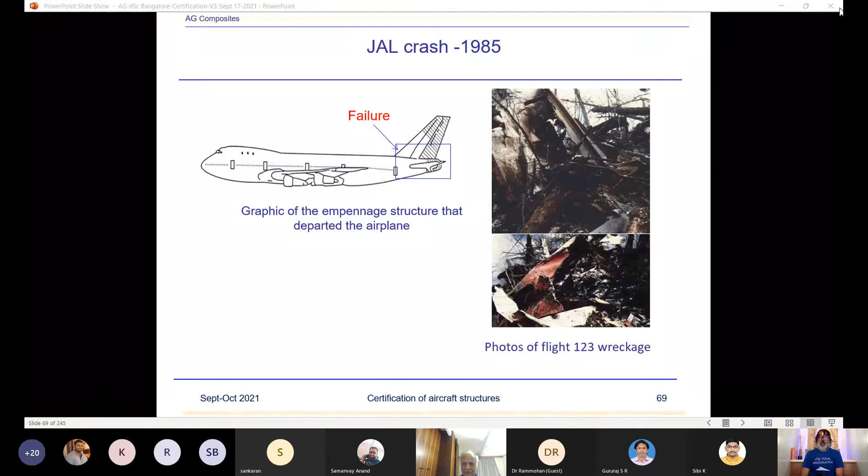Is it better now? Well, still again there's an echo. Let me see why the echo is coming. Okay, we can continue. Okay, yeah sure.

So one more participant is shown as Amar Garg 68. So probably that also, if sir can shut it off. I don't know, I might have logged in a couple of times. Oh yeah, you're right, there's a fourth one. How about now? Yeah, now the echo is not there. Oh wonderful, okay, so you were brought in four times. I removed three of them. Yeah, maybe, sorry for that, I didn't realize. Okay, now again.

Good afternoon again for this lecture. This is the second lecture of this lecture series, and we'll continue from where we left last time. Last week we had a good response from you people, and quite a few questions were asked. At that time I did answer some of them, but of course they might not have been very detailed or satisfactory answers. So what I did was pick up the questions again and prepared better, detailed answers and sent you the presentation.

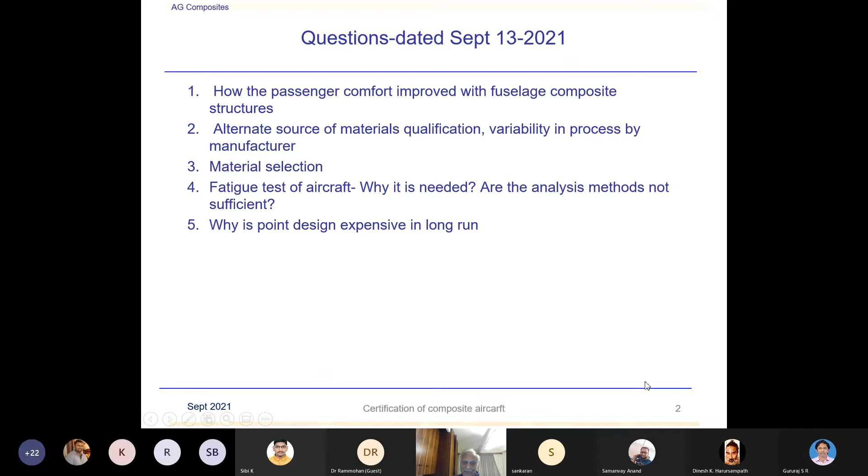For example, with a design cruising altitude of 43,000 feet, the differential pressure for 6,000 feet cabin altitude is 9.29 psi, versus 8.43 psi for 8,000 feet. I don't know the exact design condition for the 787, and even if I did, I couldn't disclose it unless it's published material. This is a hypothetical example, though it may not be entirely hypothetical. I've taken this data from a Boeing commercial jet transport report, published in open literature under NASA sponsorship, from sometime in the 1980s, which would represent the typical design condition for commercial jet transports, possibly including the 787.

The possible cabin pressure altitude is likely 8,000 feet, since that's been typical for all commercial transports, though the report doesn't state it explicitly. The normal operating differential pressure for which it was designed comes out to about 8.6 psi, fairly close to the calculated 8.43 psi, so that's likely close to the true value. There's also a maximum relief pressure considered. For ultimate pressure, if the cabin structure design follows a factor of 2 times 9.1, that gives 18.2 psi ultimate load-carrying capability, which is possibly what the fuselage skin was designed for.

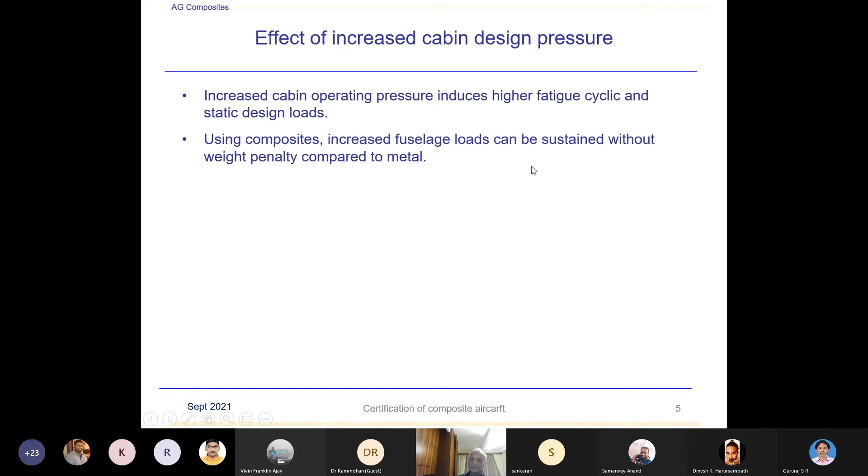Okay, next, it's just explanation. Increased cabin operating pressure induces high fatigue cycling. So static loads using composite, I've already talked about it. Okay, now next question was...

Sir, just a second sir, can you hear me sir? Yeah. Okay, is this cabin pressure fixed to a particular value, prefixed, or can it be varied during the flight? Oh, which one, this pressure? Yes, cabin pressure. Oh, cabin pressure, internal pressure is fixed.

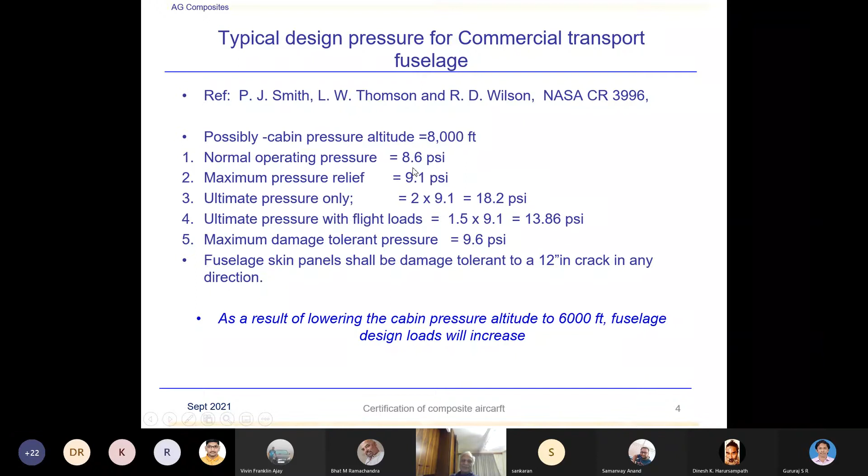This is not fixed, what happens is this is differential pressure. Differential pressure we are talking of at the cruising altitude. Suppose there is a design cruising altitude of 43,000 feet, but cabin pressure is maintained at 9.29, say suppose. Okay, I don't know what the Boeing 787 pressure is. This is from ICAO basically, the outside air pressure. They may be maintaining 10 psi, I don't know.

But this is a typical value equivalent to 6,000 feet altitude, the outside atmospheric pressure. So what happens, the internal pressure is this one. I'm sorry, this is differential pressure. What is the differential pressure? Internal pressure is this, okay. Now outside pressure is 2.49 for this, so at 43,000 feet this will be the pressure. And you have to design your structure for the maximum operating pressure. We are talking about operating pressure as a differential pressure, delta P. And that is what, when you are doing say fatigue cycling or structural stresses which are imposed, because there is internal pressure and external pressure.

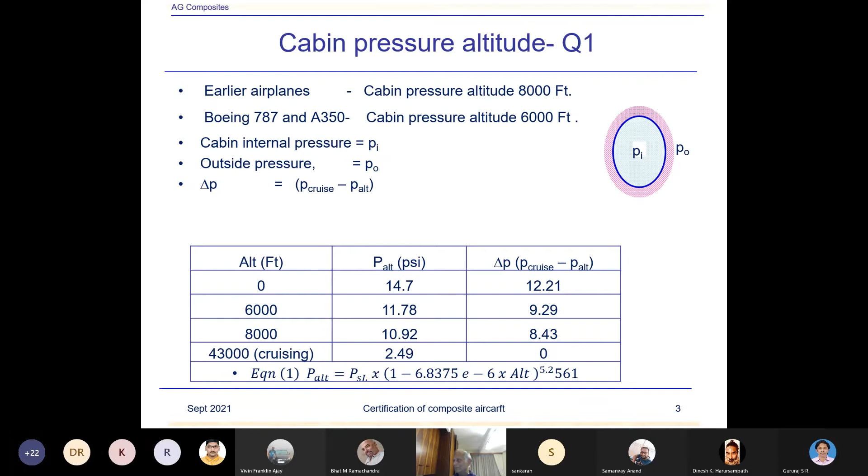Right, okay, next one.

The issue was if you have multiple suppliers, you have qualified one supplier, how do you requalify another material supplier or alternate supplier? I've written down various options: alternate material supplier, changes in processing site or equipment, changes in raw material supplier, changes in fabric type or style. Any minor or major change has to be accounted for by requalifying the material depending upon the magnitude of the changes, whether it's an alternate supplier, material changes, or process changes by the same supplier, equipment change, or assembly line change.

They cannot change anything unless they get approval from the manufacturer, that is the customer. So change in binder, alternate material, process divergence by material supplier—all these things. So next slide.

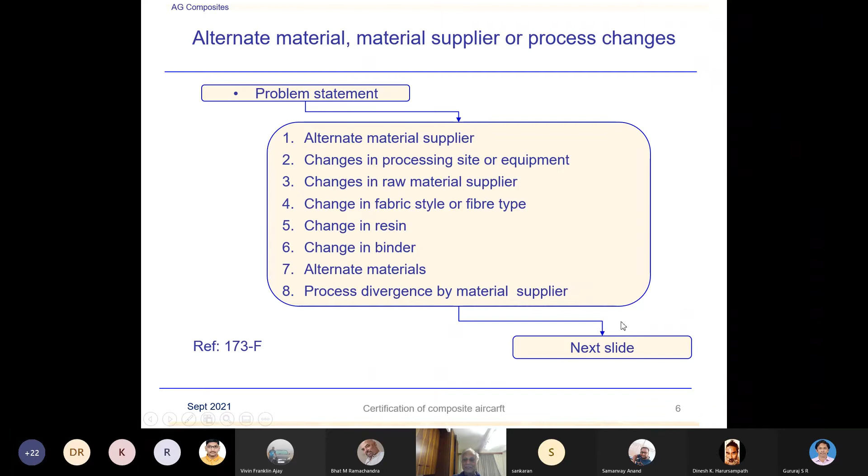So assess what happens when the manufacturer of the material or material supplier intends to make some changes. They have to communicate to the customer these are the changes being introduced and what is the impact. So as a customer, you try to assess the risk, cost, weight, schedule, and certification impacts.

Develop required test matrices and test plans, depending upon the changes incorporated. If it's a very minor change, a small type test matrix. If it's a major change, maybe a large number of tests are required, depending upon the changes incorporated.

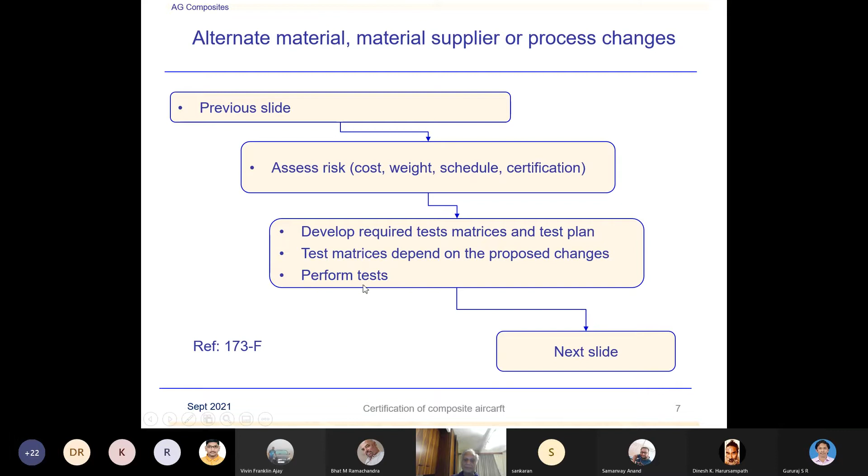So you develop the test matrix depending upon the proposed changes, perform tests, and then analyze the data. You may show the equivalency of the changed data with your existing data, whether it has any impact on the allowables. Assess the results: are allowables affected? Does it impact design and certification, cost, schedule, and weight? Then it's your final decision, depending upon the changes and effects.

So you have to do all this history. Anyone interested in looking at this process, I would refer them to read Mil Handbook 17, Volume 3. Again, it's available from the public domain, free. I would recommend each one of you download all the volumes of Mil Handbook 17. It is a very handy document.

Any question on this? Any confusion? The person who asked the question, I don't know the name, but any comments? No.

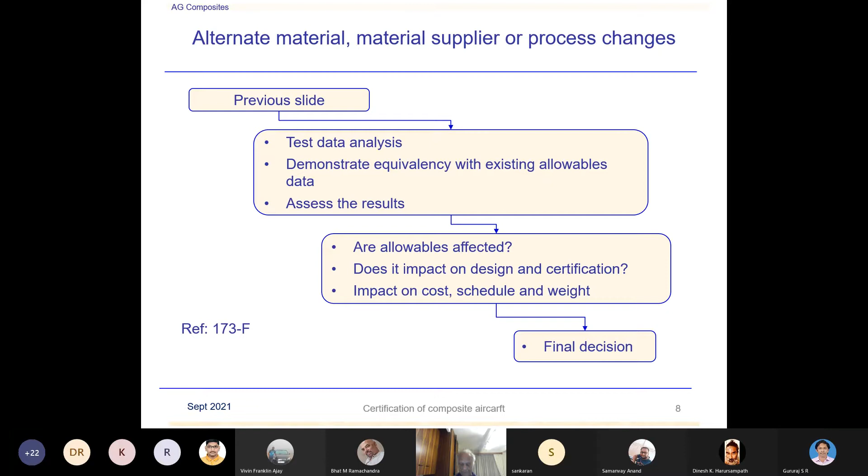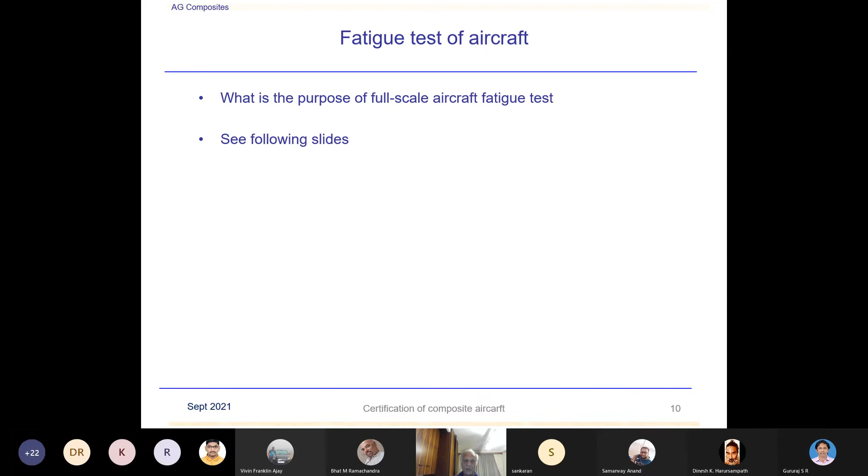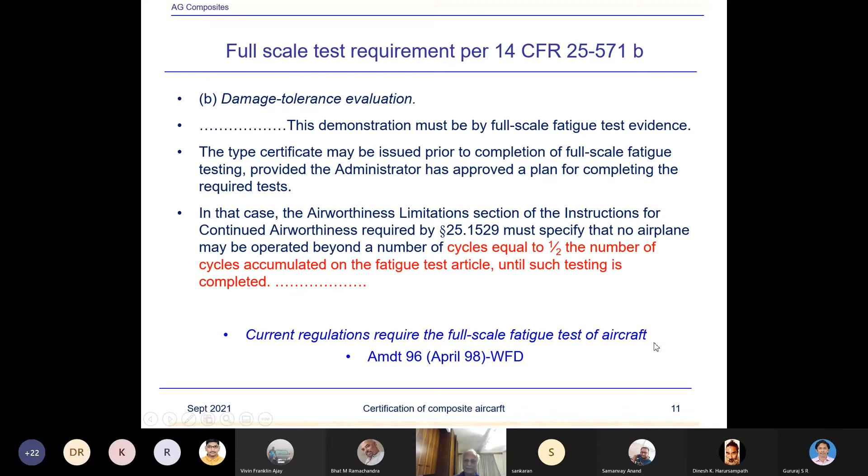Okay, material selection, of course, we'll discuss today. Then another question was, what's the purpose of full-scale fatigue test? So let me highlight a few reasons why fatigue test is required by FAA today. This is damage tolerance, as I showed last time with the criteria 571B. Current regulations require the full-scale fatigue test of aircraft.

And the reason this mandatory requirement was imposed by FAA is after one of the accidents which I'll be talking today about in aircraft accident history, where a widespread fatigue damage final rule was provided. That is 14 CFR Part 25, 26, 121, titled Aging Airplane Program, Widespread Fatigue Damage Final Rule. This final rule amends FAA regulations pertaining to certification and operation of transport category airplanes to prevent widespread fatigue damage in those airplanes.

For future airplanes, the rule requires all applicants for type certificate after the effective date of the rule to establish a limit of validity, or LOV. I'll explain the definition in the next slide. This is basically the validity for which the manufacturer is selling the aircraft, whether 50,000 flights, 10,000 flights, or whatever the validity of the aircraft is. Design approval holders and applicants must demonstrate that the airplane will be free from widespread fatigue damage up to the LOV. Now, what is widespread fatigue damage?

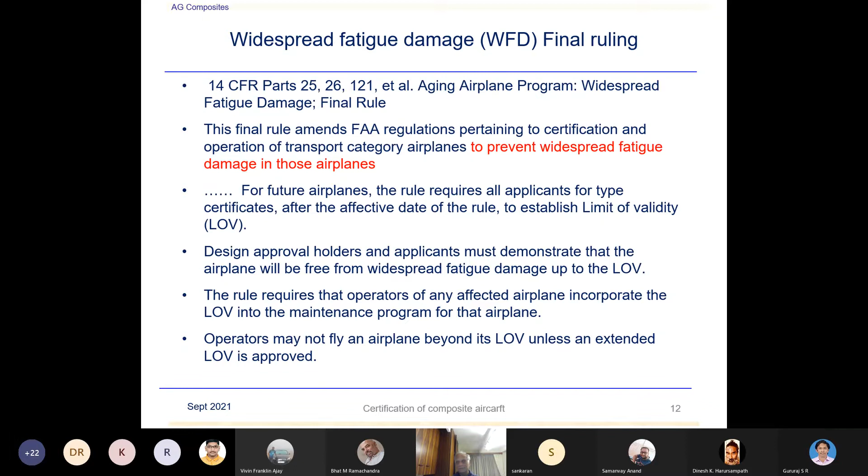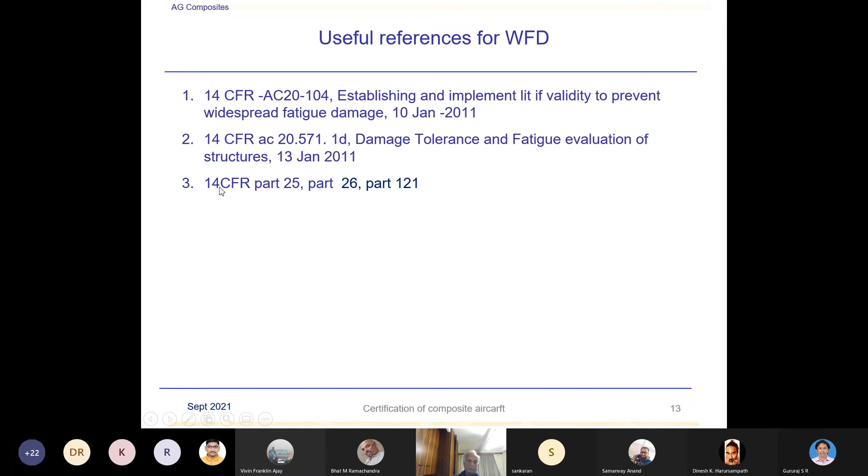Okay, I've just put some useful references over here. Those of you who are interested in going through this, it's a very important criteria for the aircraft industry. The AC 20-104 is available from the FAA website. You can download this document, very interesting. So 14 CFR AC 20-104, which is establishing and implementing limit of validity to prevent widespread fatigue damage. Then 14 CFR AC 25.571-1D, damage tolerance and fatigue evaluation of structures. It's a very important advisory circular for damage tolerance and for fail-safe structure design. And 14 CFR Part 25, of course we are talking about that, and Part 26, Part 121.

Okay, full-scale fatigue test objectives: locate areas that may exhibit early fatigue problems, develop and verify inspection maintenance predictions, provide test data for analytical service life predictions, and determine the possibility of widespread fatigue damage. This is the major criteria for which the FAA requires the aircraft to be tested for fatigue.

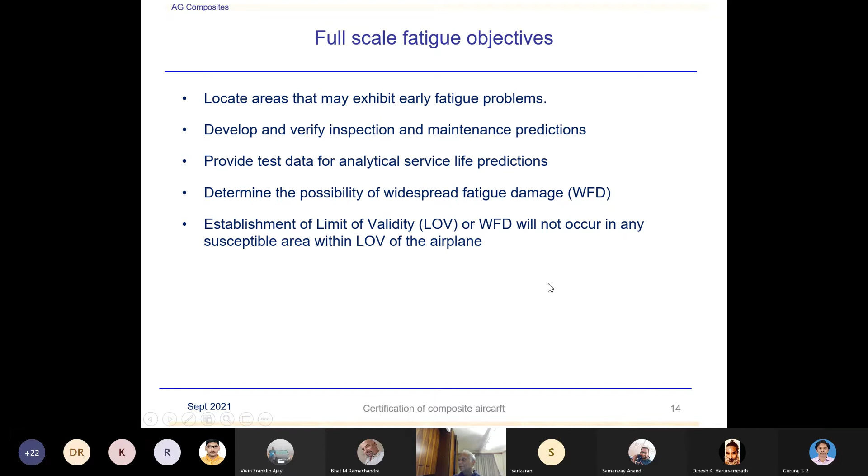Establishment of the limit of validity, because this establishes LOV, means WFD will not occur in any susceptible area within the LOV. During the LOV, which the manufacturer prescribes as the life, widespread fatigue damage shall not occur. So this is the criteria which needs to be satisfied by the full-scale fatigue test. So this is the objective, essentially.

Okay, widespread fatigue damage definition: simultaneous presence of fatigue cracks at multiple structural locations that are of sufficient size and density that the structure will no longer meet the residual strength requirements of 25.571B, that is FAR regulation. The presence of fatigue cracks at multiple sites of the airplane structure such that the interaction of these cracks degrades the damage tolerance capability of the structure more than any one crack independently. There are two types of WFD: multiple site damage and multiple element damage. I'll show what these are now.

And of course the limit of validity definition: LOV is the operational life in terms of flights or hours of the airplane, consistent with the evaluation accomplished and maintenance actions established to prevent WFD. So essentially, LOV is making sure there won't be any WFD or widespread fatigue damage. Although the LOV is established based on WFD considerations, it is intended that all maintenance actions required to address fatigue, corrosion, and accidental damage up to the LOV are identified in a structural maintenance program. LOV can be equal to the design service objective. What it means...

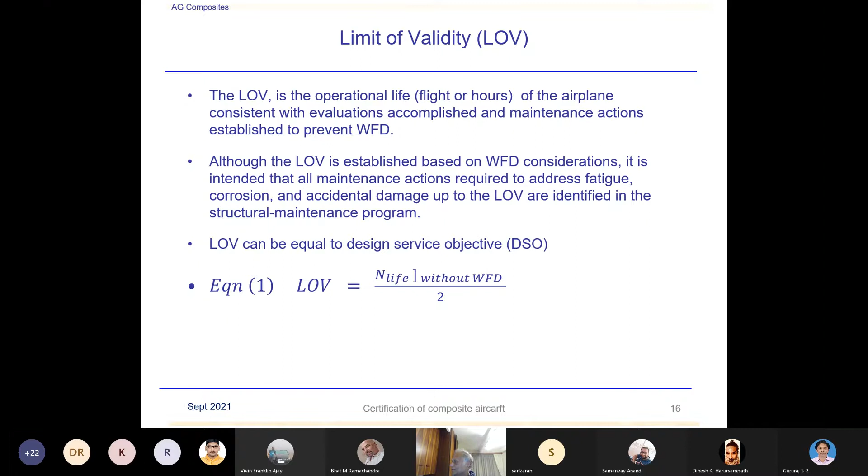Okay, now what is MSD, multi-site damage, and multiple element damage? MSD means simultaneous development of fatigue cracks at multiple sites in the same structural element. So what we are saying, suppose there is a stiffener to skin joint - this joint will have 100 fasteners there, could be 50, could be more rivets.

So what is the objective of WFD? To avoid this happening. And if they grow, they should be picked up before your residual strength drops below the regulatory requirement, the multiple cracks.

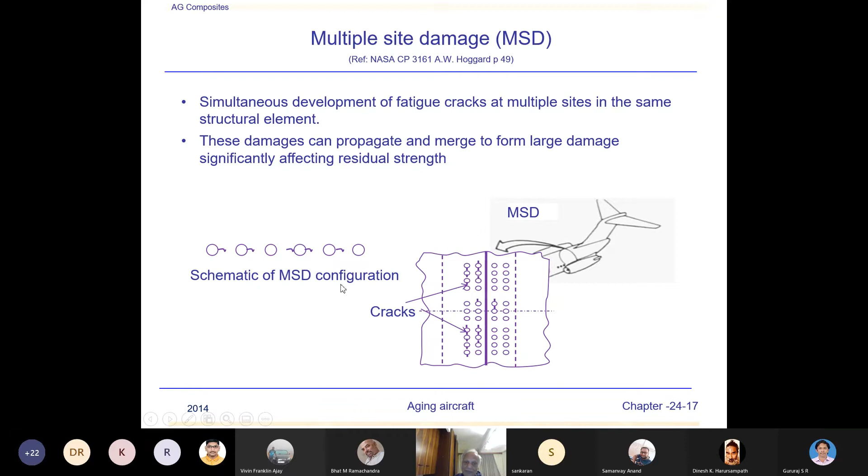When we define MSD, multiple site damage, this was within one element only, so one stiffener to skin joint. MED is different, so you have different stiffeners to skin joints, and they are multiple. Gradually the damage becomes large enough and may join with another, and that may become widespread fatigue damage due to multi-elements. So damage in the group, yeah.

These MSD and MED, are they specific to metallic structure or are they relevant to composites also? Good question.

These definitions came from metallic structure, essentially when the metal structures were failing. Such damages, of course, today in composite structure may not occur. Yes, that's what I thought. Okay, yeah, you are perfectly right.

But what happens, these rules came from metallic structure failures, and composites are still very new. But when we are talking of fatigue life of a structure, whether it's composite or metal, currently the requirement is same. Even though for composite this may be a hypothetical scenario, it may happen, but really the composite damages don't grow because we are designing with the criteria of no damage growth.

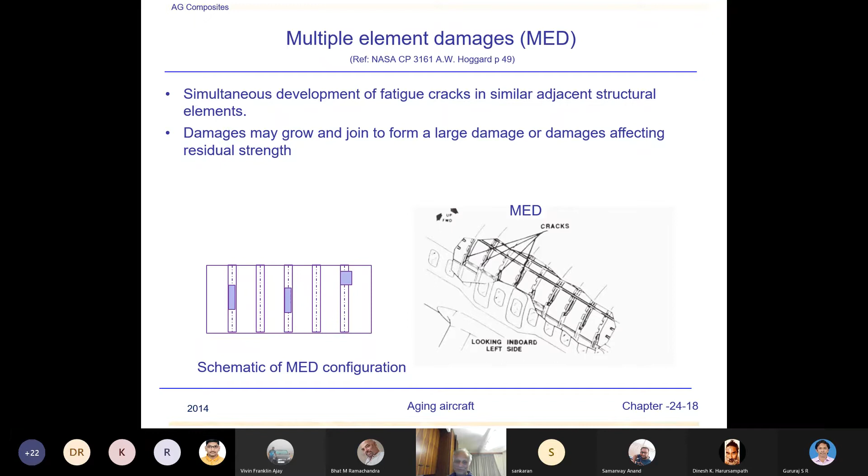Unlike metals. So you are fine, yes, but these pictures are from metallic structure.

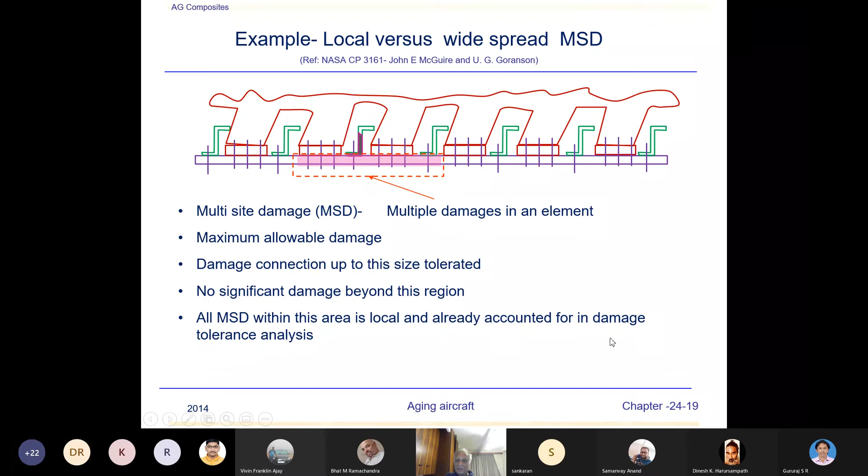Okay, so now I've already explained, and this is some pictures I'm showing here. So multi-site damage, essentially within an element, and maximum allowable damage connection up to this size tolerated, no significant damage beyond this region. All MSD within this area is local and already accounted for. So essentially same, I think I won't repeat this. I've just shown the diagram.

Okay, so this should be clear now why the fatigue test of aircraft is required by FAA, and I would provide some more background about this when I talk after this question, answering the historical failures in aircraft.

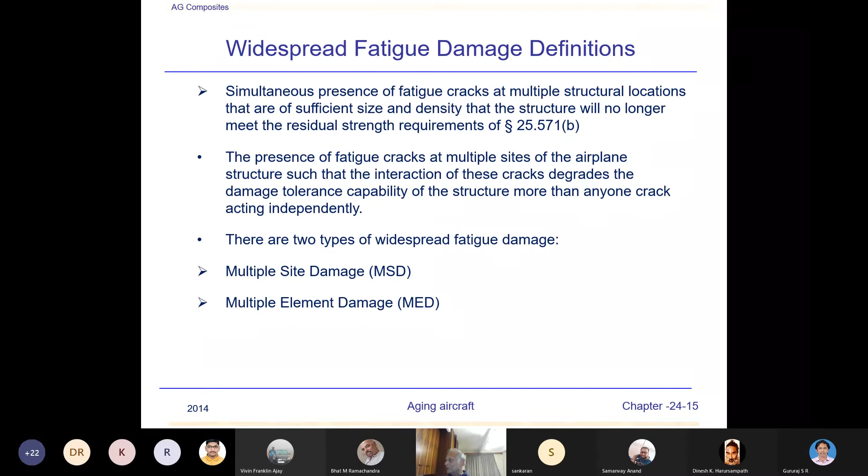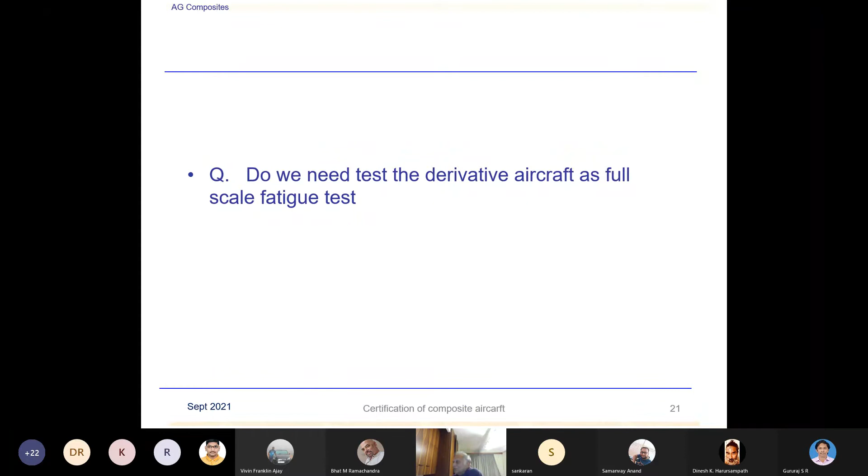Okay, next one. Do we need to test the derivative aircraft as a full-scale fatigue test? Somebody asked, do we test every aircraft? No, I said clearly, no, that's not possible. It's only the one designed aircraft which is tested for that version.

So now the question is, say the 787 has got three versions today: 787-8, -9, and -10. The baseline was 787-8. The fatigue test of the whole aircraft was done with the -8. So the question is, what happens to the dash 9 and dash 10, or similar to Airbus when they have different derivatives?

Now those derivatives have increased sizes. However, you are always piggybacking on the baseline aircraft because there are no major changes. Still, for a derivative, LOV is again defined based on WFD criteria. Criteria remains the same; the only thing is, how do you certify that derivative?

Now, based on your analysis and testing which you have done for the original version of the aircraft, you can extend the principles of the analysis and negotiate with FAA or European regulators and avoid testing the whole component again. It may be possible that you test locally, a subcomponent part of it, and try to demonstrate the equivalence and do not have to test the derivative again.

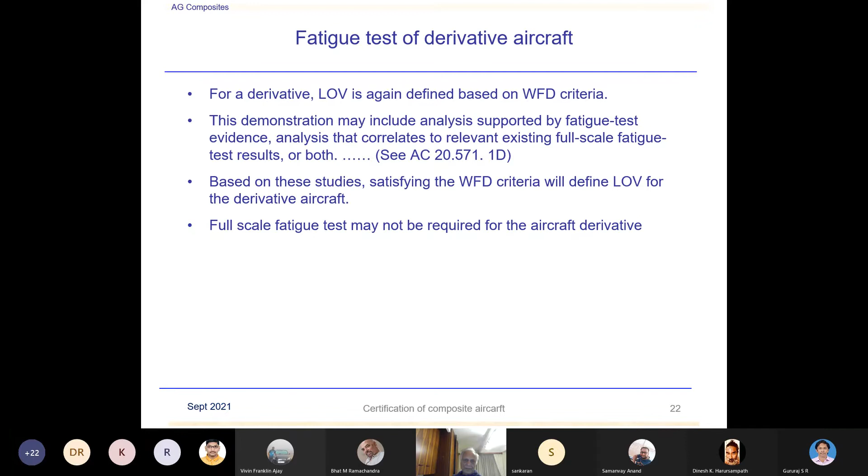Okay, now point design question. Another thing was, why is point design expensive in the long run? Oh, spelling error here, I'll correct it.

Okay, now I just draw a flow diagram for the limited. What happens with the point design? Company wants to save, suppose, the money initially and time.

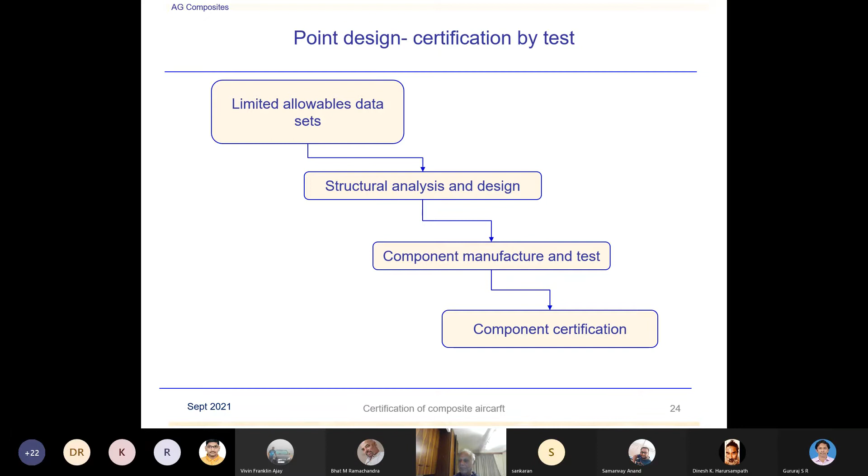They would do some limited allowables data just to do the design, and then they will manufacture the full scale component and test it. So essentially the testing and certification is based on the whole component testing. The downside of this is it has limited allowables test data.

It doesn't have all various elements, sub-elements, subcomponents test data available, which will ensure that you have been able to determine if there are some unknown effects.

Some surprises. So lack of understanding of various design and processing issues, and that is what will happen. You may not be able to understand if there are certain issues earlier, because when you are testing the full component, it may be too expensive.

If you realize there are some deficiencies in the process or the structural design, the changes become more expensive. So discovering the flaws or technical issues later may become expensive and may lead to weight penalty. Any modification to design, process, materials, future derivatives will require the full scale test again.

So that means suppose Boeing would have tested, which is basically certified, the 787-8 based on point design. When they designed the 787-9-10, they would have to test whole of the aircraft again, every version, which may become too expensive.

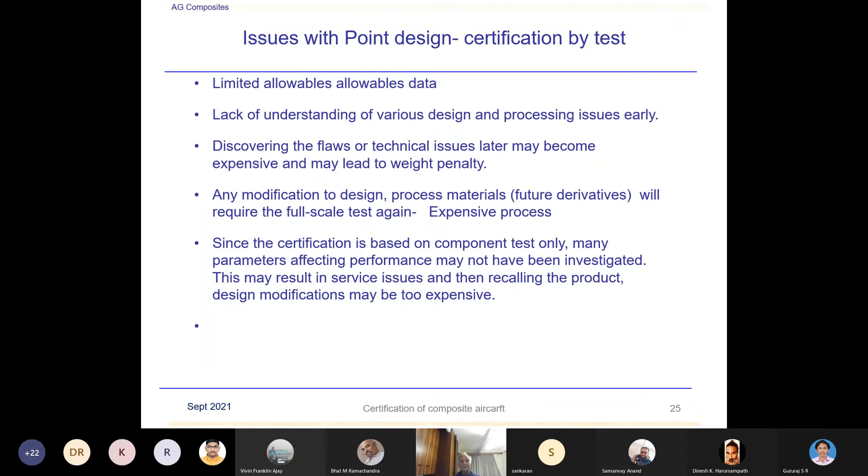Did I make it clear now to those who were confused about point design approach? Yes, sir. Okay. Okay, so this finishes, unless there are some more questions from the previous presentation.

Now, okay, I'll take up... okay, now we talked about the certification process, and I showed some slides providing the definitions of various terms for the certification, and we discussed this design certification approaches and certification analysis by test.

And then I did show the building block approach diagram, but I've just changed the order of those slides. The material is, you can just download again. I've sent the revised presentation today to Professor Dinesh, who would have put it on the server to be shared by everybody. Okay, now, so I just want to talk about this one, although this shows.

So why is certification done? What is the objective? The final objective of certification of any product, by the regulators, is to ensure safety in design, fabrication, operation, maintenance. So the main objective of all this exercise is to ensure the safety of the people, passengers, on ground, everybody.

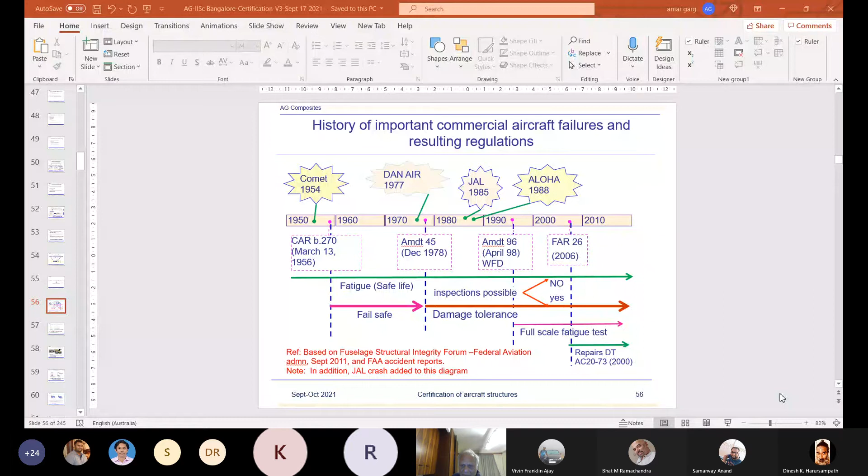Yeah, you can make it full screen as well. Yeah, thanks. Now it's fine.

So essentially, when I started the safety slide, I covered historical failures and regulation changes, learning from failures. This slide you see is a good one telling a lot about the regulation changes and why they happened.

What you see first: in the 1950s, the first commercial jet airliner, the Comet, was designed in the 1940s and began flying in the early 1950s. It was a beautiful aircraft.

Unfortunately, three aircraft failed in the early 1950s. I think in 53, 54, within one year, three aircraft failed, and that led to lots of investigations into what had happened.

When the Comets were designed, the design philosophy was the safe life of the structure—we'll talk about what safe life means—and this philosophy may not have been able to pick up the deficiencies in the design.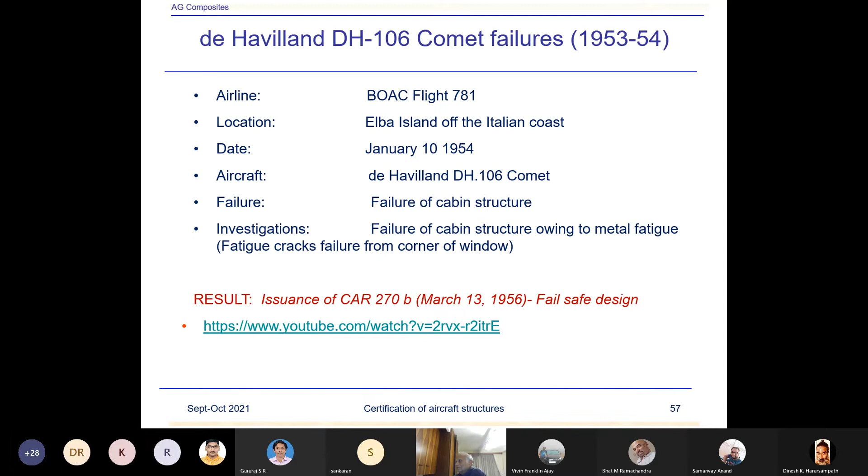I don't have time to go through the video, but I would recommend you look up these failures on YouTube. Links are given here for the aircraft. It's very interesting to watch videos of these failures to understand what went wrong. They're beautiful videos.

The issue was with one of the Comet failures. After investigations, I've taken this picture from the failure investigations, showing the cracks around the window.

There is a square window. The square window has high stress concentration, as you would know, in the corners. Normally you would not like to design a window with a square shape. Of course, none of the windows after this were ever square again - they're always elliptic.

But this is what happened. The cracks initiated from the corners in fatigue and led to disastrous failures, which de Havilland didn't realize when they designed this. They had, in fact, proof tested it at twice the design pressure and approved the design.

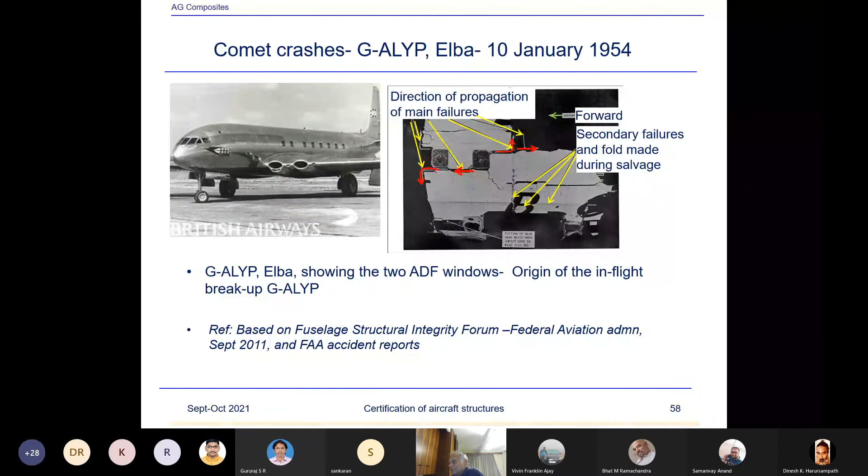This just shows Comet failures caused by design. Elliptic hole we know is good design. This square design is poor design.

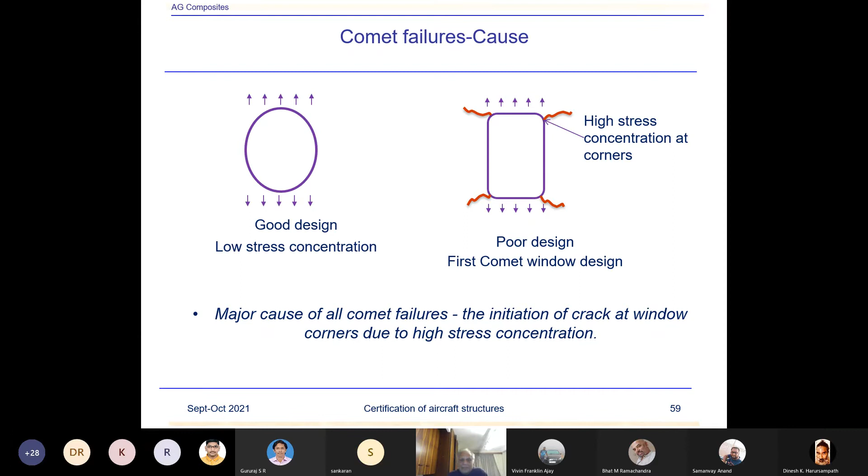The issue, what you see in this diagram: on the left, it shows the initial cycling of 30 cycles of the aircraft cabin under this pressure. P is 8.25 psi per cycle, the operating pressure for which it was tested. They applied double this pressure, 16.5 psi, for 30 cycles, and then failure occurred after 18,000 cycles. So the total life of this cabin or fuselage is about 18,030 cycles.

However, look at the right. When they tested the cabin with the operating pressure of 8.25 psi, they got only 3,057 cycles. What is the difference? Why is this? Anyone from the audience?

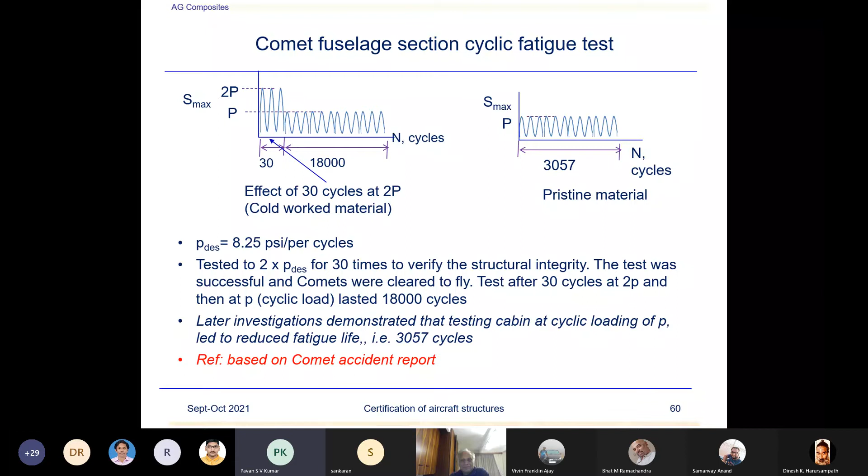Okay, then here - this was Boeing model 707. Now, as he said, at this time the fail-safe philosophy was there. When the Comet was designed, the failure occurred at the time of the safe life philosophy. Here, fail-safe - this aircraft had been designed using the fail-safe philosophy, and still there was a failure.

Fracture of the right-hand horizontal stabilizer, no survivors. Investigation into the fractured stabilizer revealed that the fail-safe characteristic of the structure did not perform as intended - there were shortcomings in design assessment, certification, and inspection procedures.

Again, you can watch this accident, the failure, on YouTube - an interesting video. So the failure - this is the failure - horizontal tail rear spar failure. The rear spar was taking almost 80% of the bending load.

And this has the top chord, top web, center chord, lower chord, lower web. So the spar web flange is divided into these sections in order to have fail safety measures. But still it failed due to overloading.

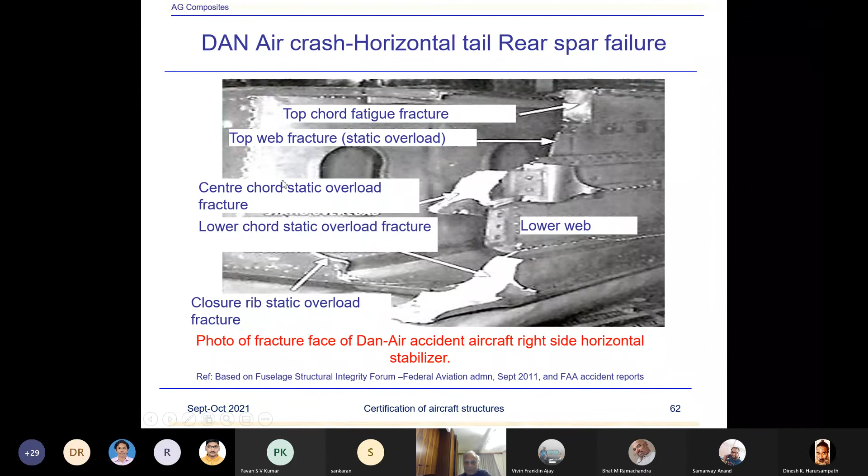Now here I've just taken a picture from the same source - this is a Dan-Air failure. What happened was this aircraft, before Dan-Air took it, was with Pan Am. Pan Am had flown it for 16,285 landings.

During this time, it seems fatigue cracks had already started growing, which were not detected - they were not found by inspection, it seems. So a fatigue crack developed, then there was a sudden jump. At this stage, it's Dan-Air's tenure, which failed within 438 cycles, but it had already done 16,000 flights plus another 400 flights. So a major static jump, a short static jump, and then the final static failure led to the total failure - essentially due to the development of the fatigue cracks.

And if those cracks are not picked up during inspection, they may become catastrophic. That is why the damage tolerance approach is far more reliable than fail-safe. So today, the damage tolerance criteria is almost mandatory.

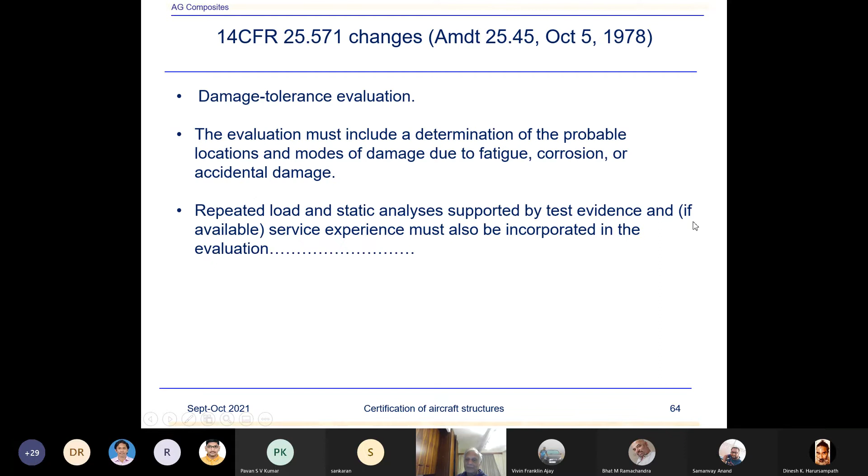Okay, so damage tolerance evaluation led to the damage tolerance. The evaluation must include determination of the probable locations and modes of damage due to fatigue, corrosion, or accidental damage. Repeated load and static analysis, supported by test evidence and if available service experience, must also be incorporated in the evaluation. Okay, third accident.

Investigation led to the failure of Aloha Airlines maintenance program, because during the maintenance program they could not pick up the damage which was already propagating, detect the presence of significant disbonding and fatigue damage, which ultimately led to the failure of lap joint at stringer S-10L and separation of the fuselage upper lobe.

So if some damage is not able to be picked up during inspection, it may create havoc.

So this led to the issuance of Amendment 96 for widespread fatigue damage. So when we were talking about fatigue damage, it was because of this failure criteria. FAA made a ruling on widespread fatigue damage. And that's why now the LOV, or limit of validity, of the aircraft is defined, which will ensure by test and analysis that there won't be any widespread fatigue damage causing the failure of the aircraft.

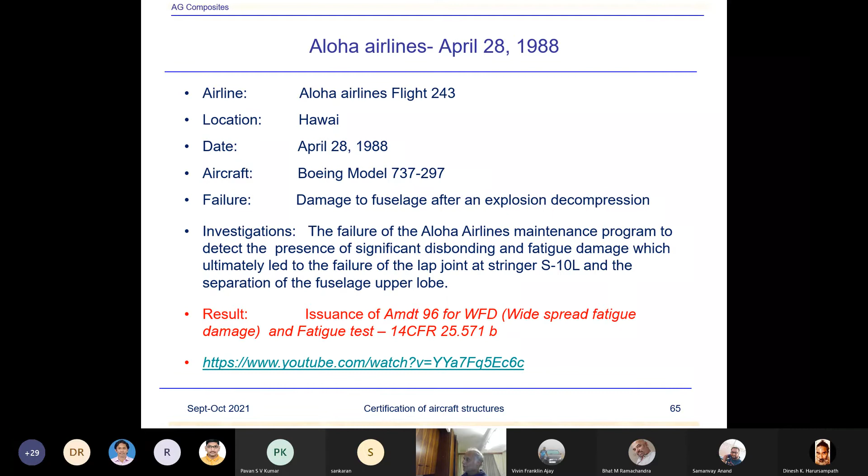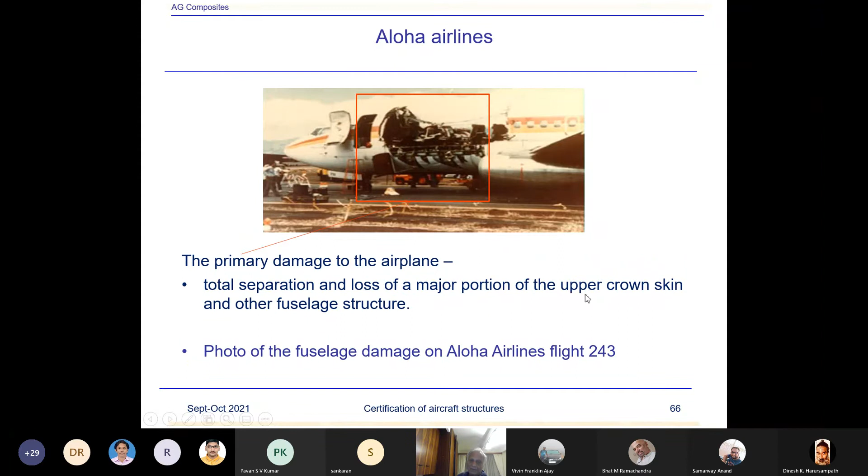You can see here the failure, total separation and loss of major portion of upper crown skin and other fuselage structure.

Okay, now what happened during this accident, why it happened? And you can realize the importance of any joints. Essentially, most of the aircraft accidents have occurred due to joint failure. Normally the cracks start from the holes, rivet holes or fasteners, or the cracks in the rivet or the fasteners. They lead to the failures.

Okay, now what happened? During service, due to fatigue, the bond line broke. Imagine the situation now, what happens when the bond line is intact? The rivets will not be loaded at all because the bond line will take all the load. Joint stiffness is higher and the rivets will virtually not be acting.

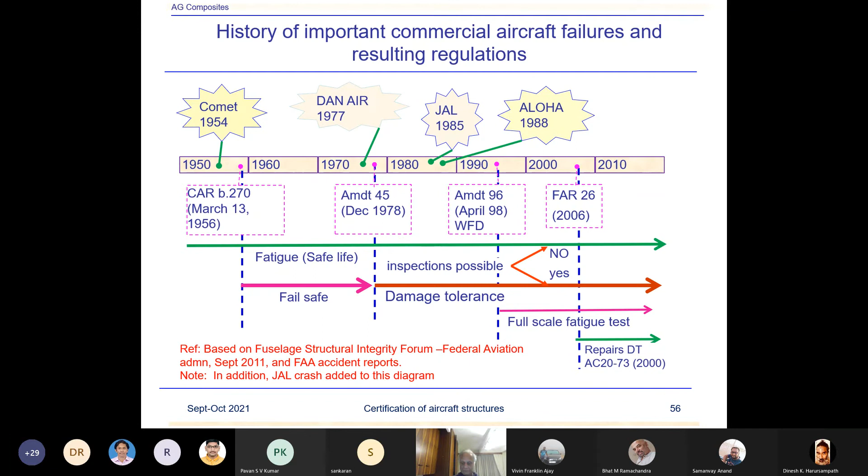And we'll talk about that when I'm talking about details later on.

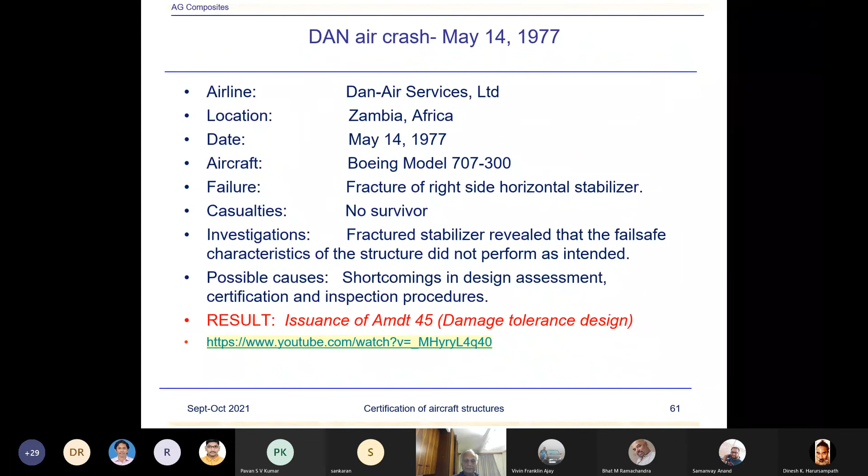Okay, so let's consider what happened here. The whole rear part got separated.

It's very interesting, actually. Again, I would emphasize, in your leisure time, go to YouTube and watch the Japan Airlines crash video.

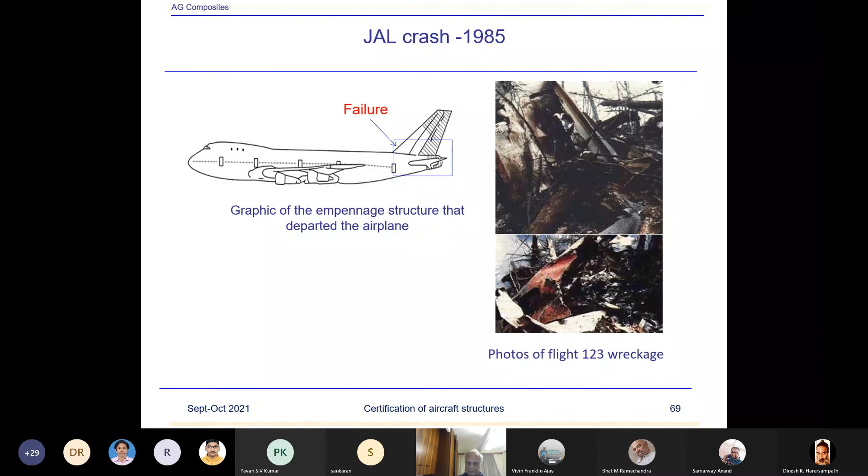Now what happened here, you see the design for this upper dome, lower dome skin, and there's a splice plate, rivets, the stiffener. So this is continuous. All this splice plate is continuous.

Whereas, because this repair was difficult, it seems to be performed during maintenance. So maintenance personnel, without understanding the implications, cut corners, they cut the splice plate here to simplify the repair.

So what's the consequence of this? Earlier in this case, when the load is being transferred, there are three rivets which take the load. Of course, this will take the highest load, the first rivet.

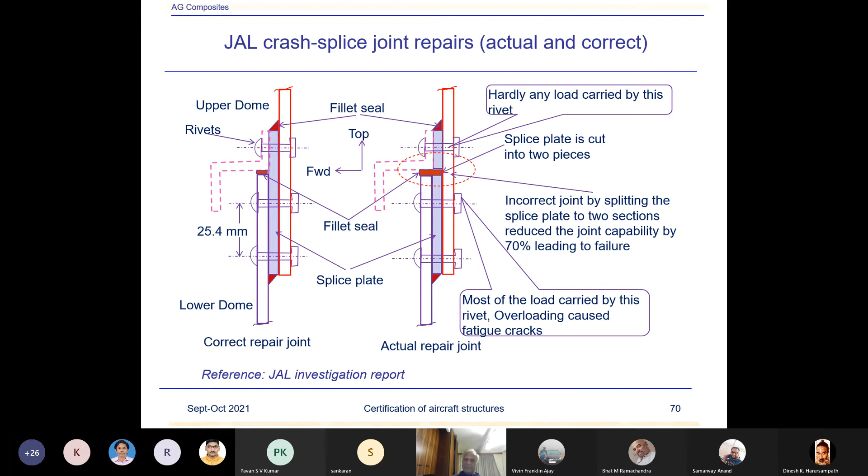You see in this slide, the cracks initiated, some crack would initiate and then continuously they kept on growing.

So improper repair led to fastener overloading resulting in cracks. Over a time period of 7 years between the repair and the accident, fatigue cracks propagated along the row of fasteners, leading to rapid fracture. So essentially, this is like widespread fatigue damage that gradually propagated and led to the failure.

So lessons learned: repairs should be accomplished in a manner that preserves the original safety features of the airplane. Aircraft maintenance programs should be developed consistent with actual aircraft operations. Fatigue properties of complex structural elements should be well understood so that in-service maintenance programs are properly designed.

And this led to, as I said, issuance of AC 120-73, which calls for repairs with damage tolerance.

Any comments, any questions? In fact, there's only 10 minutes left in the lecture, let's see if there are some questions. Yeah, I have a question.

Yes. Now the slides you were showing, a cold bonded adhesive. Yes. When it was converted, when it was improved to a hot bonded one, the situation improved. What sort of laboratory tests do you do to compare the cold bonded and hot bonded, either at the specimen level, or a part structural level, or the entire component level? What sort of testing to prove with confidence that it's because of this?

Well, I'm not sure what testing would have been done by Boeing at that time, and it's very difficult to go into the history. They would have done lots of investigations. They would have tested the coupons, they would have tested the elements, and redesigned the components or subcomponents.

However, your question regarding how do you make sure of the hot bonded and cold bonded differences. So the best thing is you would do some testing using lap shear coupons. Yeah, that's what one expects.

That's what one expects. Possibly a part structure of that element, some load test relevant to the design also must have been done, it's possible they would have done that. That is an element test, because let me tell you, Boeing normally takes things very seriously, and does lots of testing before they put anything out. They would do a lot of testing, so they would have done enough testing to substantiate the bonding.

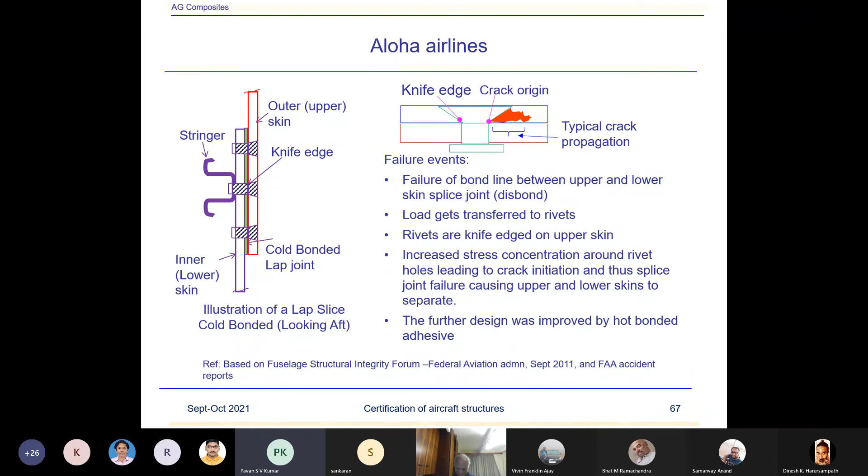Excuse me sir, between this safe life and fail-safe design, out of these two approaches, which one overestimates the life of the material or something like that? Because this is dependent on number of cycles, right?

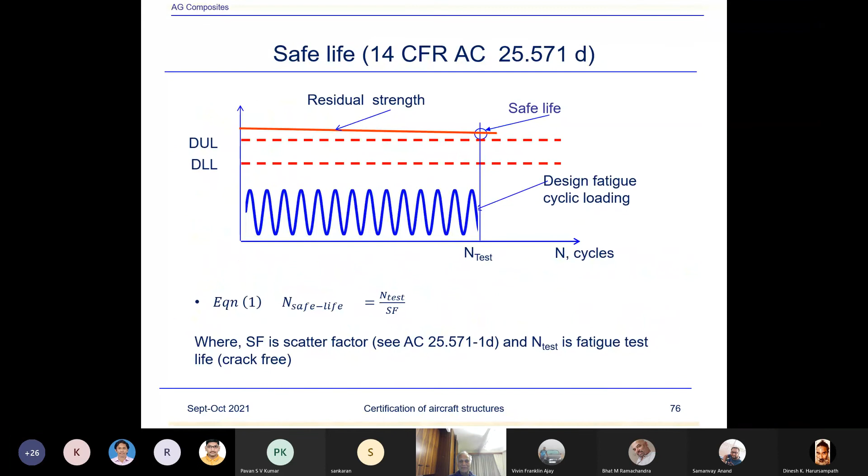Yes, in fact I'll talk about that. In my further presentation, we'll be discussing the differences between safe life and fail-safe damage tolerance. To provide an exact answer as to which one gives a higher life is difficult.

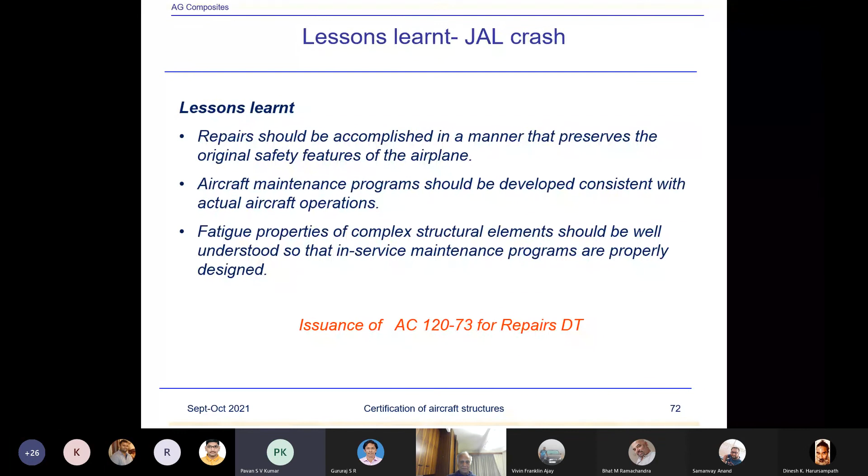Okay, so after this, accident investigations, I may start in the next lecture, but if you have any more questions, I'm willing to answer.

Yeah, Dr. Garg? Yes. The whole set of slides presented today was very interesting and very informative, but all these are referring to the metallic structure, I guess. All these accidents, all these cases were purely metallic, I guess. Maybe it evolves into composite structure. Perhaps this information is what I think.

Is it so? Okay, now it's a good question. Why did I try to show this philosophy? Composite structures follow this too. Why did I want to show these accidents? They are an important part of the science. They tell us why we use the philosophy of damage tolerance, or fail safe, or safe life, and what the differences are, and why today the damage tolerance approach is mandatory. I understand all these accidents occurred due to metallic structures, but they have taught us a lot. Still, 50% of aircraft is metal.

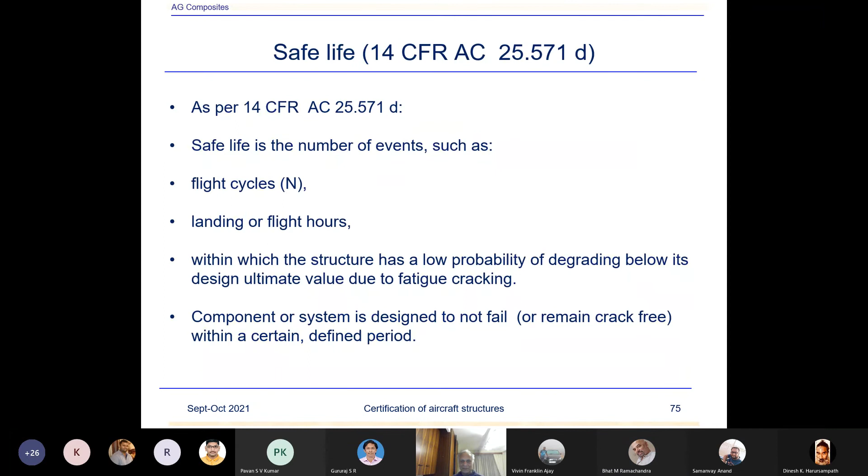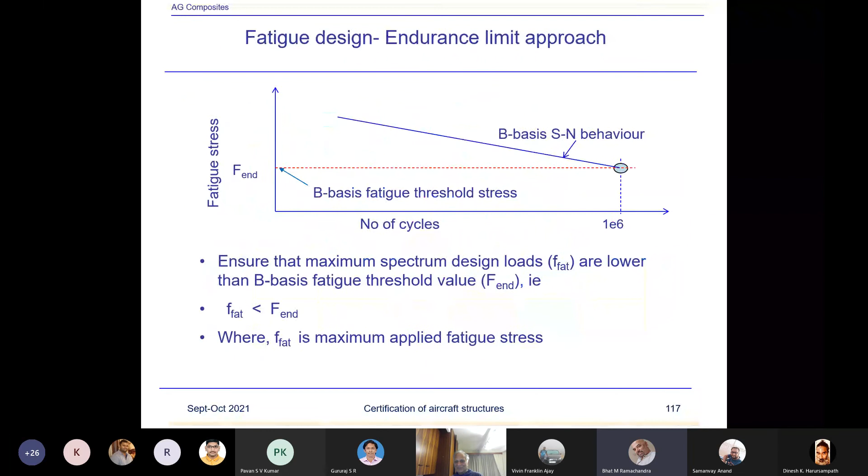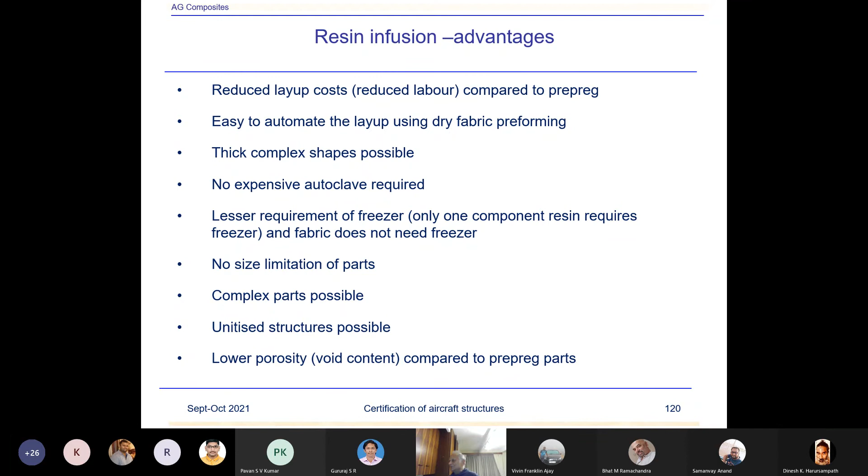Yes, I understand our objective is to talk about the composite structure design philosophy here, and if you see all the presentation I have further, it's all composites now. So I'm not deviating from the focus of composites, because that's the main topic. However, the philosophy for composites and metals is similar, with the additional requirements of composite structures. If you scan through my lecture, you will find everything is composite beyond this criteria.

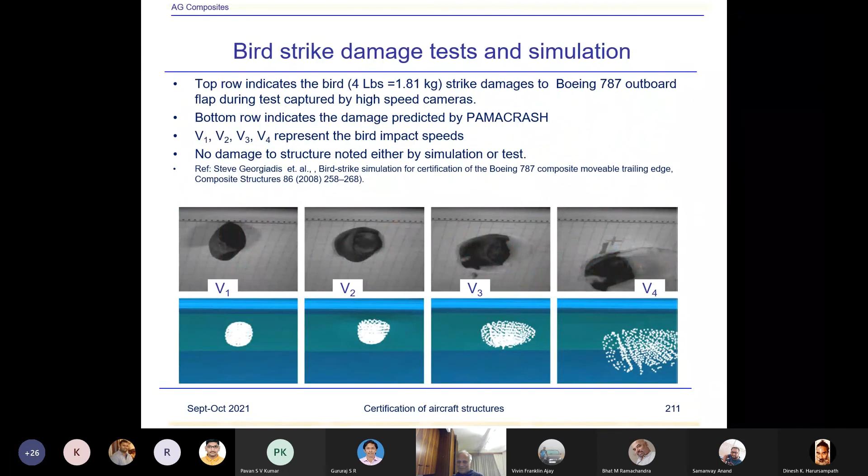No matter, that's fine, Dr. Garg. Even otherwise, it was very interesting, and I'm sure all this information and analysis would have helped to arrive at the analysis of composites and all that.

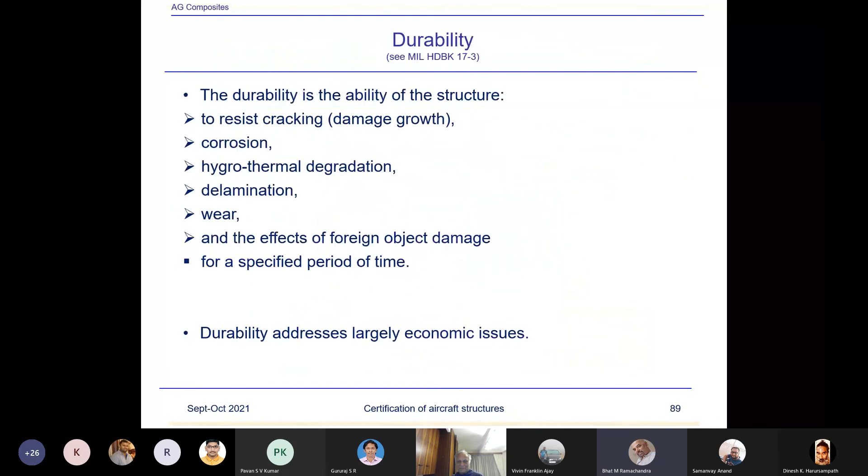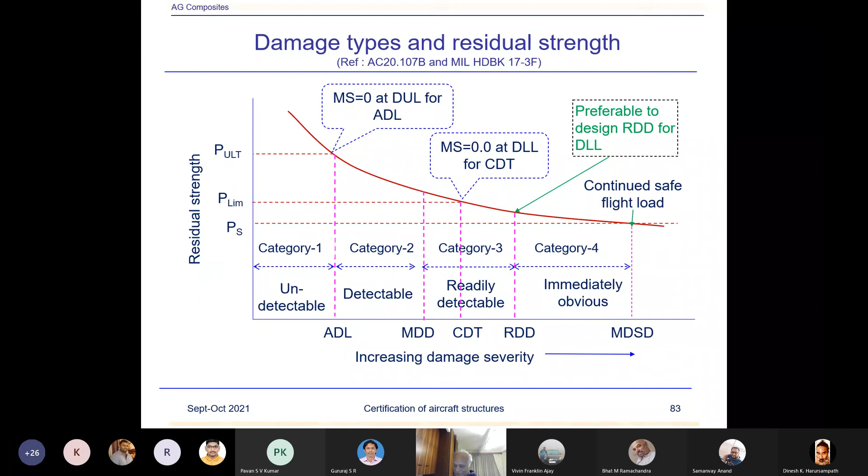Right sir, thank you. So we'll discuss more in detail next week, although of course I've been going pretty slow, it seems. I may have to go a little bit faster in order to finish this. So thank you very much, Dr. Garg. I think it's okay to go slow so that you answer the questions to the satisfaction of all the audience members, so I think that's more important. So if necessary we can probably extend it by a day or two, depending on your availability. That's fine with me, actually.

This happened with ADA also, actually these lectures kept on extending. I really liked it, it doesn't matter for me. Yeah, because I like to go slow when you cater to the questions of the audience, many of which are highly relevant, and you're putting in a lot of effort towards answering that, so I think it's going pretty well. That's okay, I'm happy to go with this slow pace, because the objective is to understand things rather than going fast and finishing the slides - that doesn't serve much purpose. Right, but these are all useful things. Each of the criteria, and most of the slides you'll find are very relevant, especially for people thinking of joining the industry, whether ADA or HAL, anywhere in or outside India, or doing research. Important topics actually, out of this one, even for PhD students.

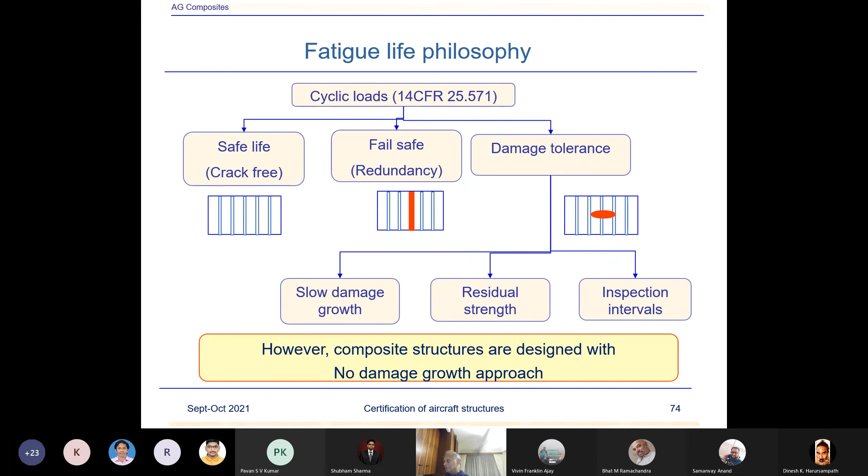Like, suppose in a composite structure, the requirement is when you are trying to determine the residual strength, suppose the wing skin is a stiffened structure, the requirement is a two-bay crack. You have to design that. Beyond two-bay crack, the crack should be arrested. The residual strength should not drop below the regulatory requirement. We'll talk about that - if you see, in fact, in this presentation, I've got the slide. See this one, and we'll talk about that.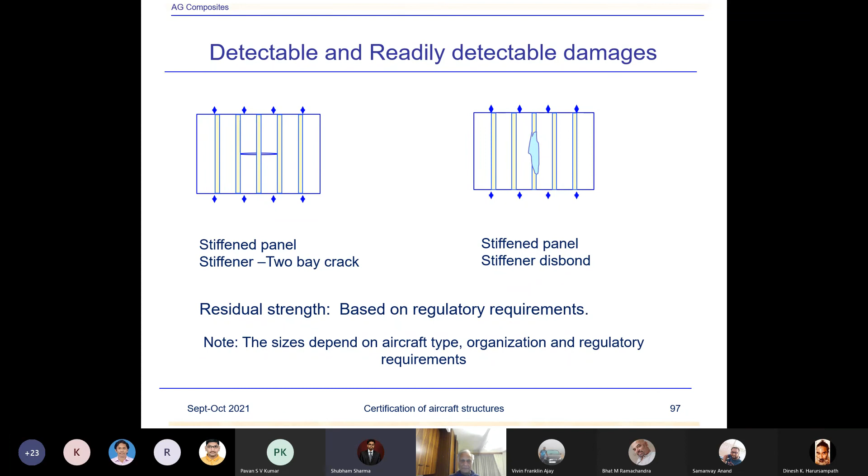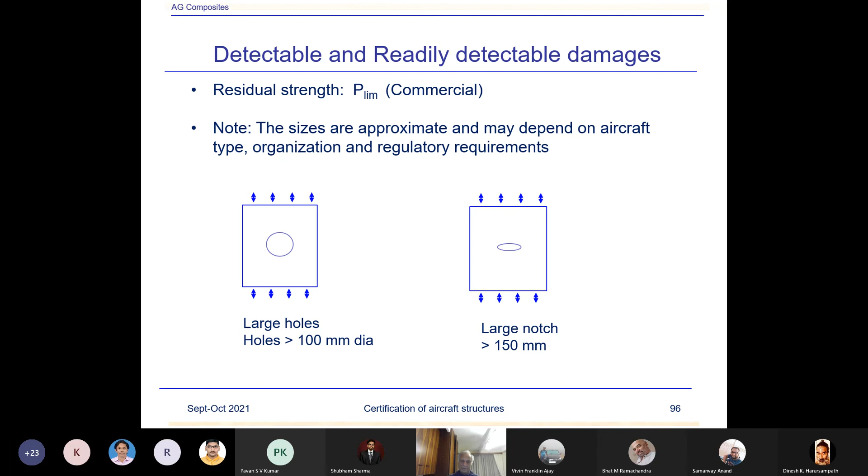Okay sir, thank you. Most of the things are covered in this - what you need for the certification of a composite structure. I have tried to cover each of the phenomena which you need to satisfy, each criteria for certification of the structure. So you can just scan through this presentation, you have already got a copy of it. In fact, you can ask questions based on this presentation in the next lecture. I may clarify more the contents of the slides. So I've tried to cover most of the things, as you will see in this.

Sir, shall I ask one more? Yes, sure. Sir, I have read that composite structures offer very low sound attenuation compared to metallic structures. So does the use of composites in aircraft call for higher cabin noise, or how is it tackled from the human comfort point of view regarding certification?

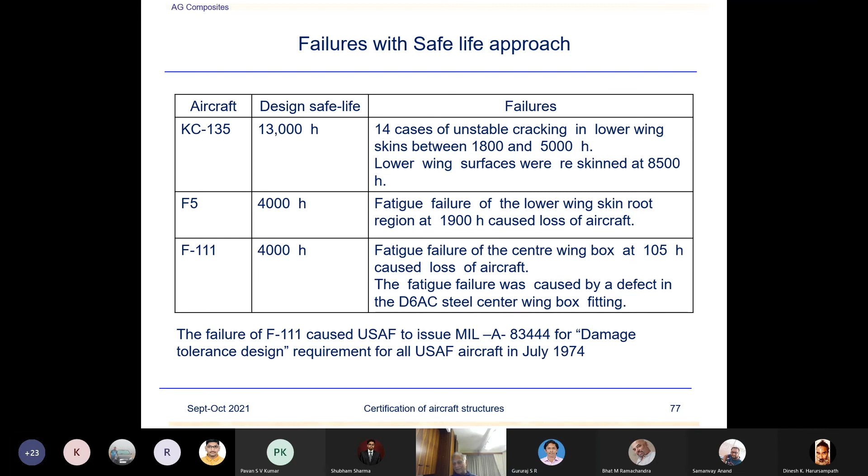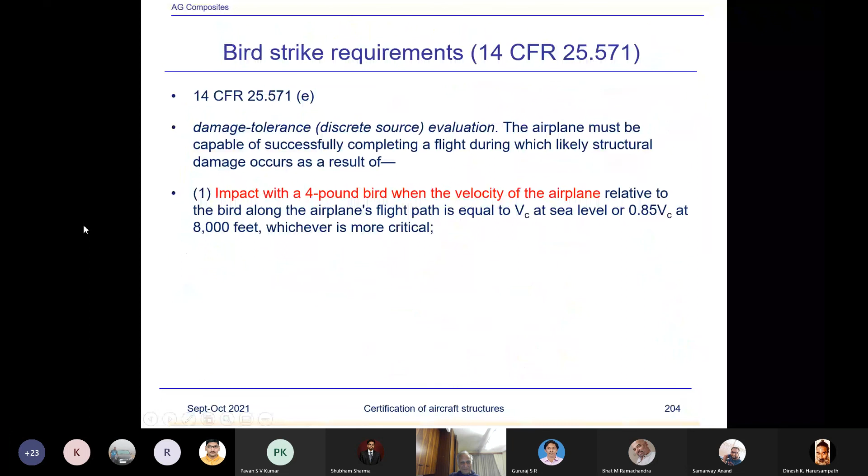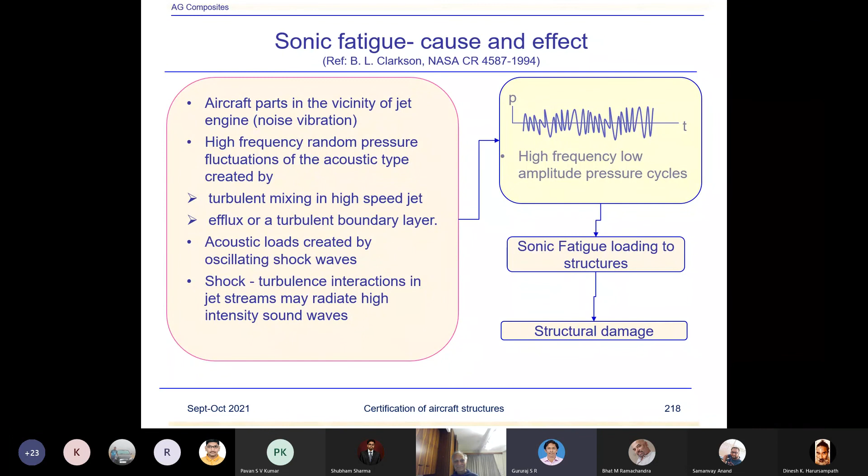Okay, now I'll show you that. We talk about sonic fatigue, and bird strike. Okay, sonic fatigue, I'll cover it. Okay sir, fine. Here I've put some explanation, although I have not been able to go into the details, but each of the subjects is a big subject.

Excuse me, sir, just one last query. Sir, with fasteners, we have this knife edge where the stress concentration is very high. So how are we going to eliminate that, or are there some efficient fasteners where this knife edge is less? Rivets are used almost in all the parts to connect, so are we using something like - how do I say that - like in composites we don't use fillet?

No, not in composites, in metallic structure I was thinking. Yes, in metallics you have the rivets, but again there's always a rivet-to-skin thickness, rivet-diameter-to-skin-thickness ratio appropriately considered so that you don't have that knife edging, the cracks initiating easily. So there's always a minimum thickness to the rivet diameter, so the countersink is not deep enough to provide significant knife edging such that cracks initiate.

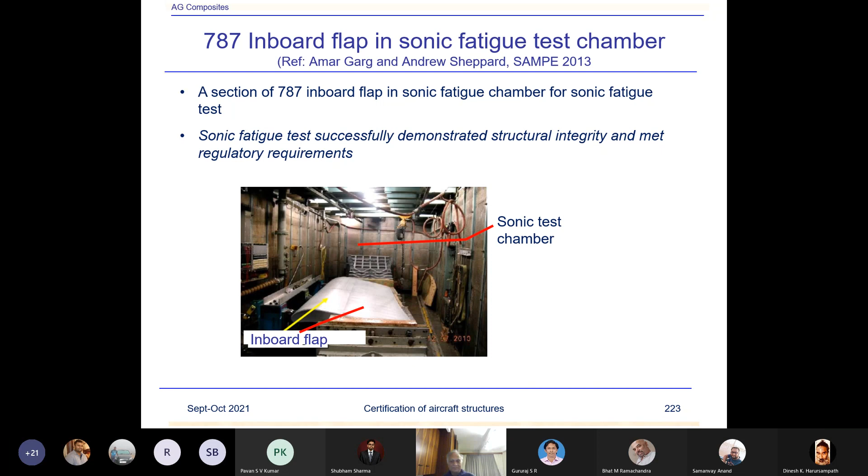Good evening. Good evening for all of you, and it has been very pleasant for me to have shared many thoughts, and I really enjoyed the questions being asked from the students. Good, okay, good evening. Bye-bye. Bye. Thank you, sir.